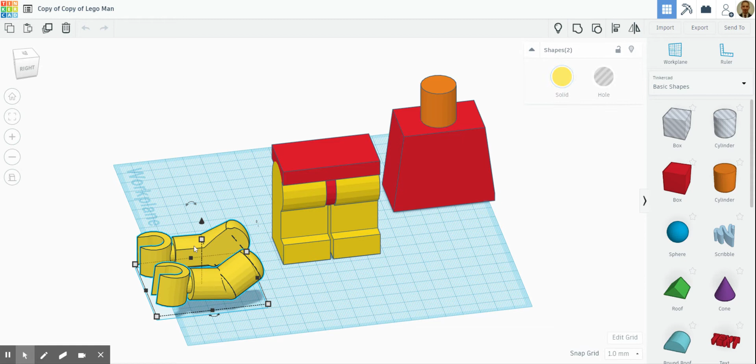Okay, so we're just looking now at the torso and the legs and hip. Remember, if you switch this button on and off, you change between views. Because we're doing some moving around today, it's a good option to have it like this, so we just get a nice view from the front.

What I'm going to do first is get it into a position where I want it, and then I'll use the align tools to get it exactly where I want it.

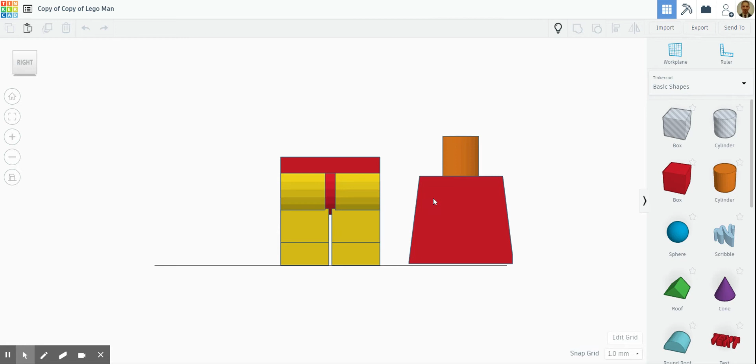So I'm going to click here, and the first thing I do is use the cone to click and move it up to whereabouts I think it is. Now down here, remember, you can change the increments, so if I make it move up 2 millimeters or 1 millimeter, this is really good for precise movements.

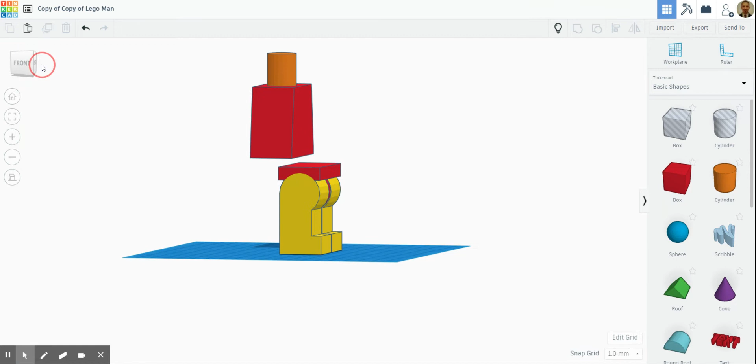So thereabouts, then I'm going to spin round and look to the front view, and then do the same again, but this time use the arrow key just to try and line it up with that hip. Looks like it's in line there.

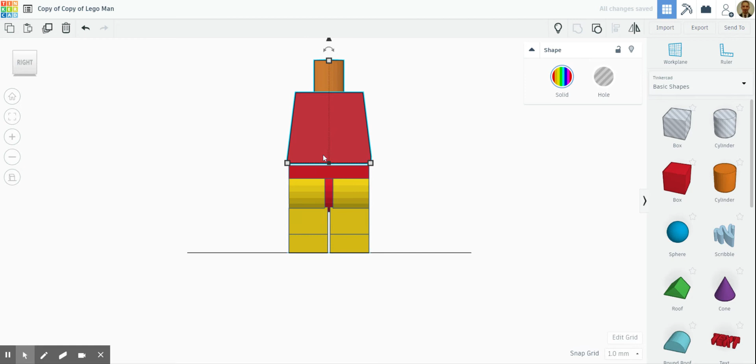Spin my view around again, and now I can use this view and then use the arrow key to get it into roughly the right area, like that. So I can see that's a little bit off, so a little tap.

What I'm going to do is just move to the 3D view, and I'm going to click that and that, hold down Shift, go to Align, and I want to click this one down here, which will line it into the middle, like so.

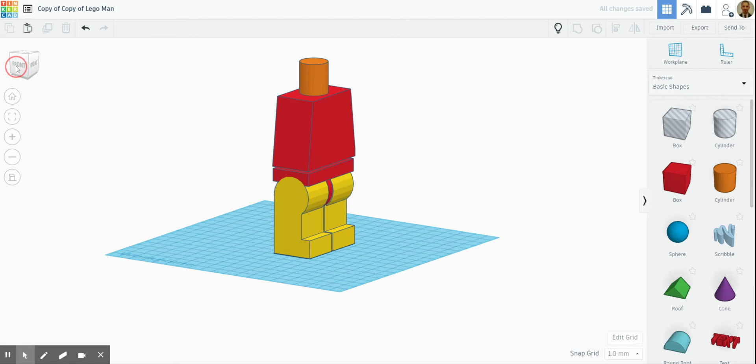And then I'm just going to change my view, and I can see that it's almost there. So a little bit of fine tuning now. I'm going to click this, and I'm going to just slide down this movement.

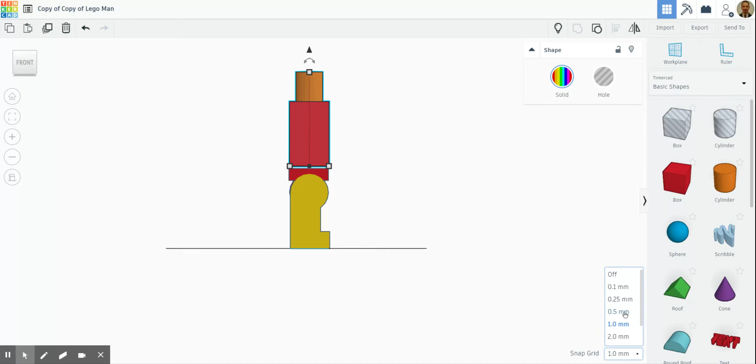By clicking the cone, I might change this to 0.5, like so. Okay, like that. A little bit further, probably, so it just touches it.

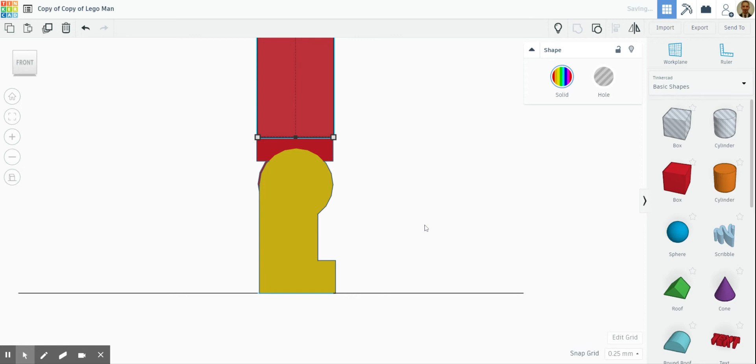Okay, and then we can see it's just touching, and I'm going to just change this, and then just a little movement. Still got a little bit more. Going for perfection. Okay, in line, perfect.

Got to look from the front now, and we can see I'm not quite there. So again, some little taps with the arrow key just to get it in the right place. That looks about right to me. So I'm happy with that location of that part.

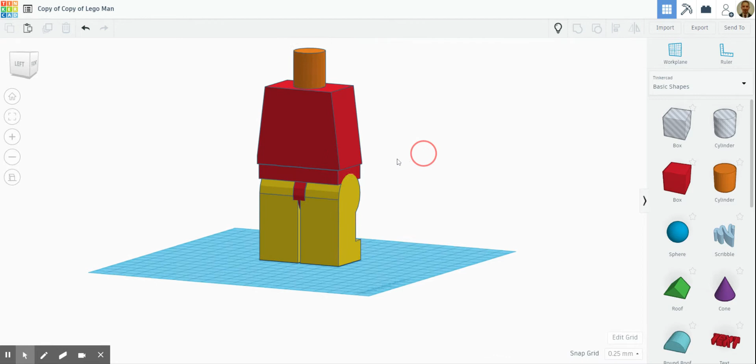Now I'm going to unhide the rest of the parts.

So here, now I'm going to go for the head. So let's go to right, same as before. Again, we're not rushing this. We're trying to be as precise as we can, using all the views to get it right.

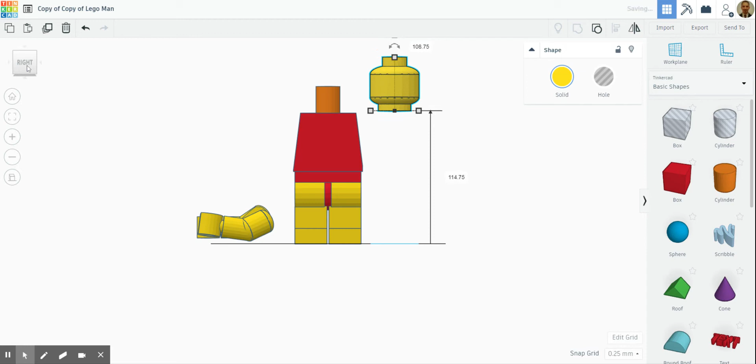And spin around to the other side. And then again, I'm going to use the arrow keys. I'm going to increase this to get a bit more of a movement.

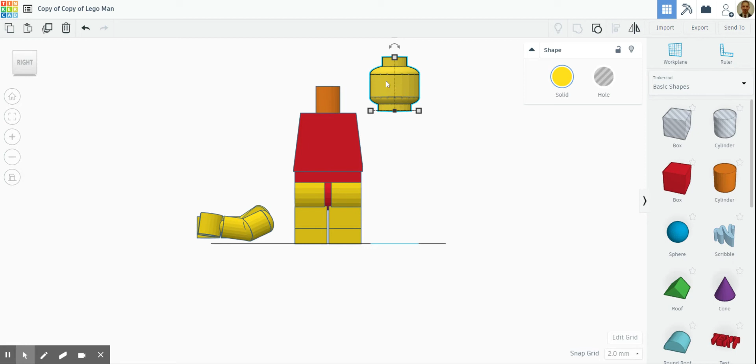Okay, so it's there. I can now know that if I move my view around, like this, I will then put this in the right place by moving it across. Okay, like so.

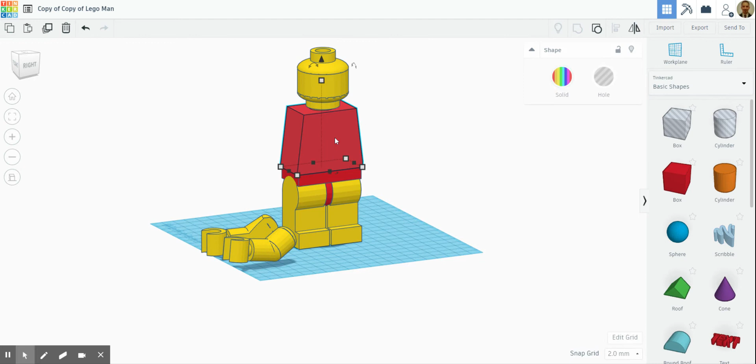We can also look from the top, looks about right from there, look from the right. If you want, you can click that and hold down shift, with those two parts click the align tool, that part, and then that part, click align to align that head to that torso.

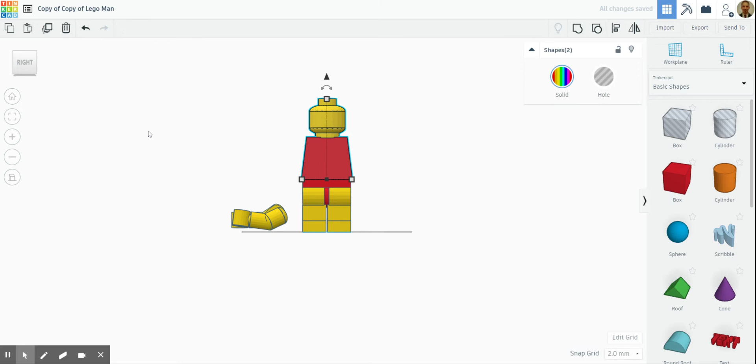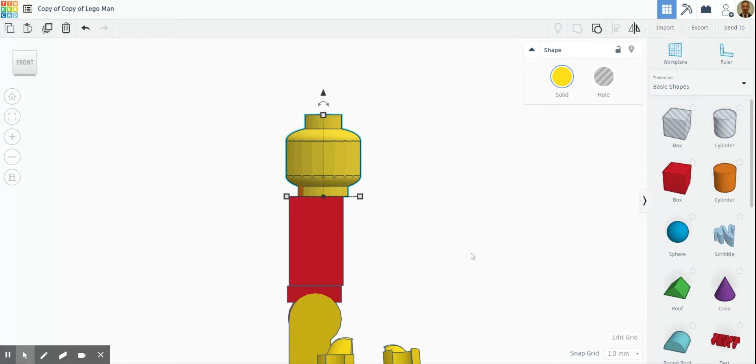That looks nice. I'm just going to have a quick spin around, see if anything else has moved. Okay, I can see that when I did that align, a few things moved. I can also see that things aren't aligned here, so I'm going to get that and change that increment, move the head.

That looks better. Now what I'm going to do is click that and then that, and group those two parts together. When you're grouping, make sure that you have this ticked, multicolor, which means it will keep the colors the same. So the head is now grouped to the torso.

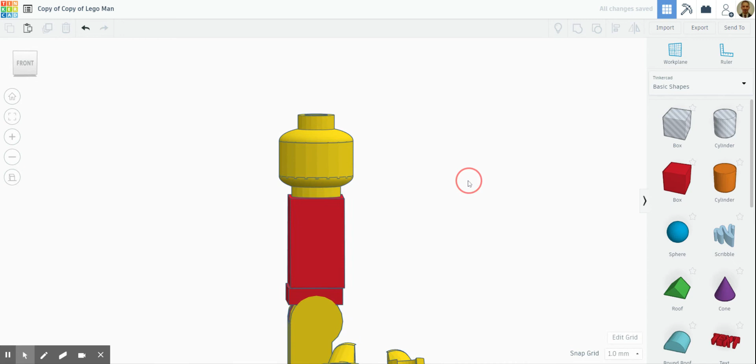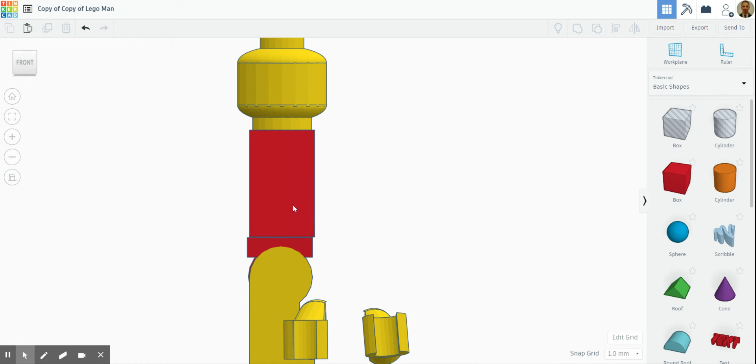And what I'm going to do is tidy up that part there, at the front. It's going to be a funny view, that. Okay, that's better, I'm going to just move that across. There we go, okay, I'm happy with that as well.

So once I'm happy that's in the right place, I'm going to repeat the process. I'll click that one, making sure I've got this multicolor here, and group the legs to the torso. So now all that is grouped together as one piece.

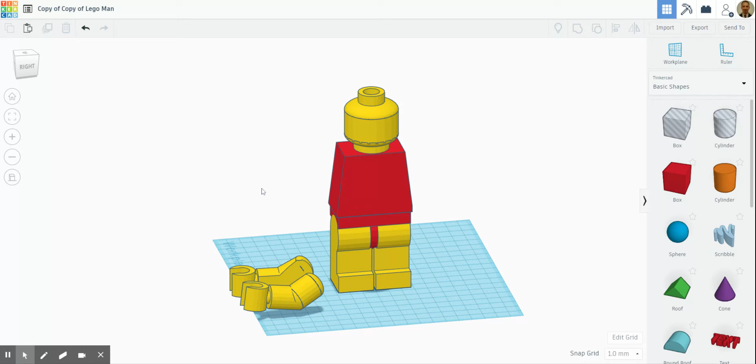Now I have to do the arms. The arms will go on either side of here. So for that, we will first need to rotate both arms. So click, and then - not make them bigger, don't do that. See how easy it is to make things change size if you're not careful. Rotate them round, say 90 degrees.

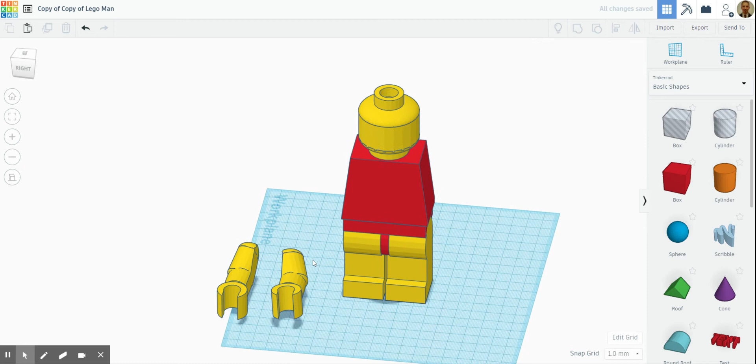And then what we're going to do is move this arm to the other side, right across like this. Make sure I'm in the right view. And then I'm going to move that arm right across like this.

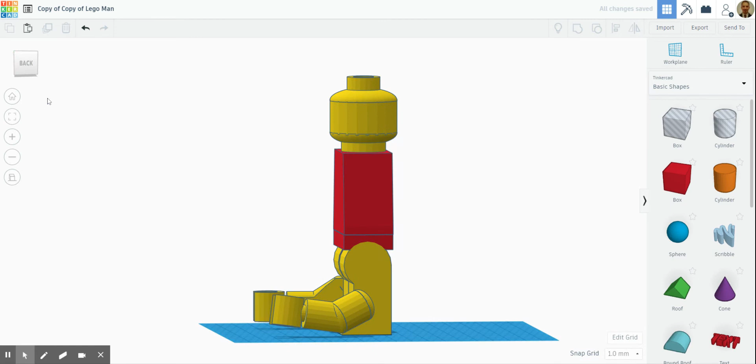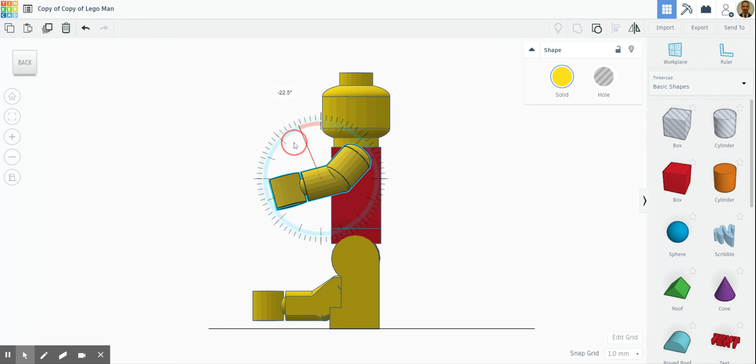So what we're going to do is put a bit of a rotate in that arm. Maybe this arm, let's say, going up, or we'll have him - yeah, like that I think. I'll have one arm down like that, okay?

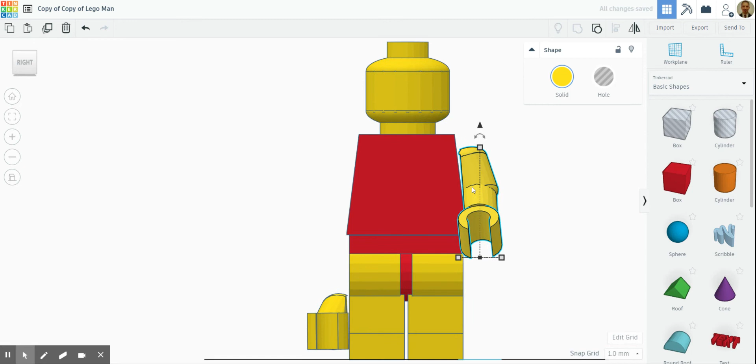And then I'm just going to move that to whereabouts it would be in the midpoint of his sort of area here, down to the front, and again just that idea of getting it nice in line with that. Now, because there's a twist in this arm, we have to put a twist in this to make it touch this.

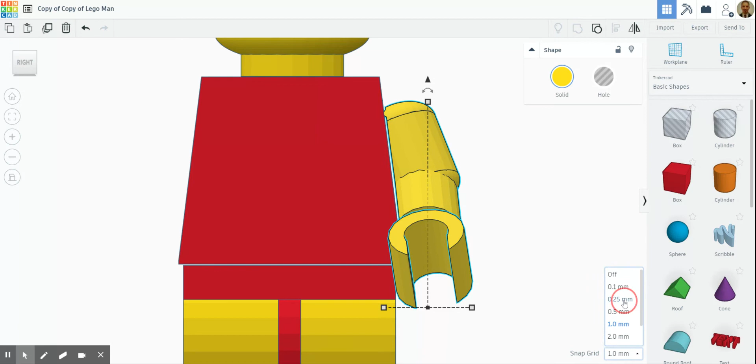So again, I'm going to click this, hold down shift, give a bit of a zoom. Okay, a bit of a zoom. And all I'm going to do is put a very slight rotate in the arm. Okay, so that's almost parallel with that. Click that, and I'm going to change this to 0.25. There we go, it's just touching there perfectly.

And I can see here I've got a little gap, so that might need a bit of tidying up in a minute. But I'm just going to do that afterwards, and then I'm going to do the other arm. So the other arm, again, same as before. And again, we're not rushing this, we get it precise - that's really important, getting it precise.

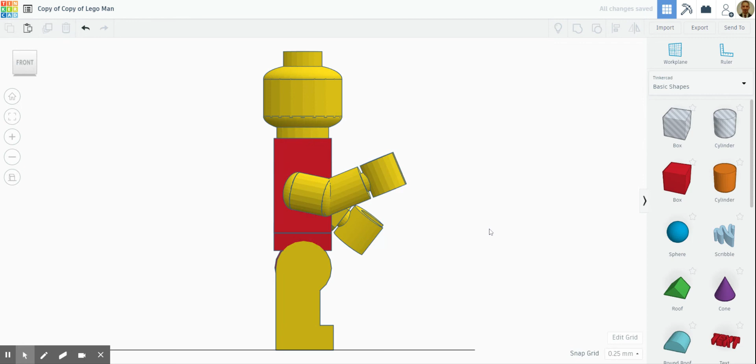Arrows, and I think I might just keep this arm straight. We'll rotate it up a little bit like that. Okay, and then we'll move him up a bit. Try and get the same part. If you can't find it, look from the back, then try and line these two points up, and you'll be able to see that it's roughly in the right place because we want the arms level.

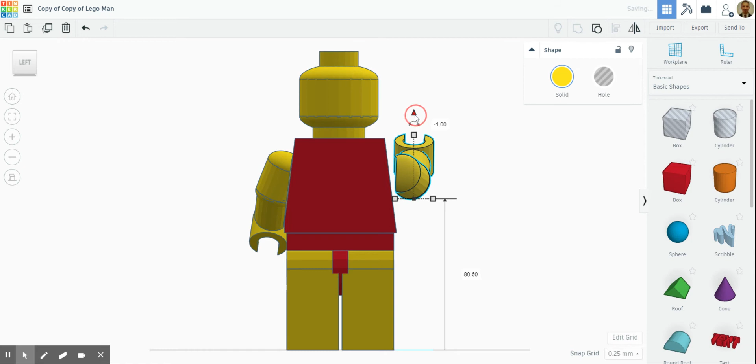Or if you want to be super accurate, you can measure from the bottom. But I tend to find in these sort of situations, if you do it by eye, that tends to be pretty good too. Then, as before, let's look at the front, and let's move this again across.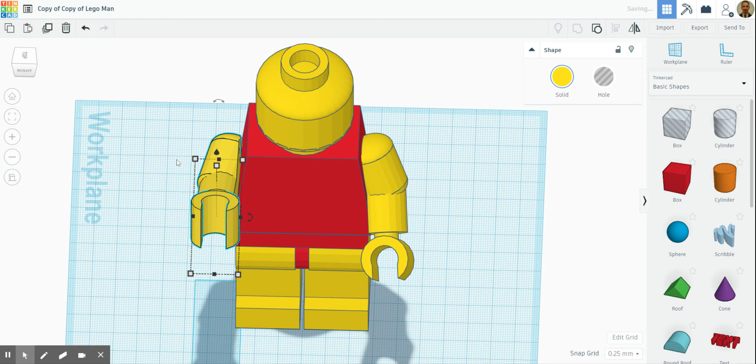I'm just going to change my view so I can see a bit better. Orthographic, clicking that. Okay, and then I may look for the top this time, and I'm going to put that slight rotate into the arm. You can just see, again, let's have a look from the right.

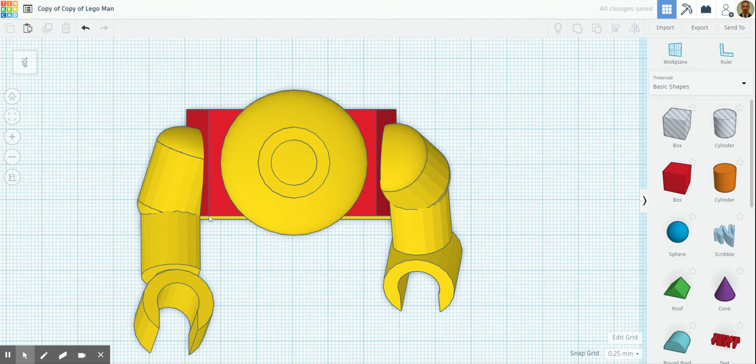You can just see it's nearly there. Then look from the top. This is really good for you to understand how to assemble things and use different views. There we go, that looks good to me.

Right, so let's just zoom out. Let's have a look what it looks like. Okay, yeah, arm there, arm up, arm down. I did say that I wanted to try and improve that little area, but it looks good to me.

So if we switch to 3D view, and then we can see now, if we highlight all of it and make sure that is multicolored and group it. So that is the Lego Man done and finished.

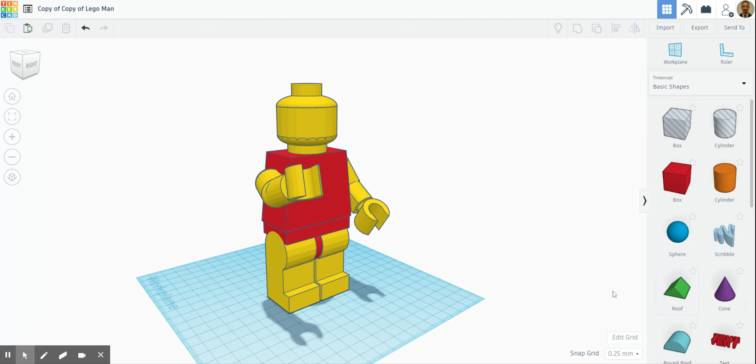What you could do as an extension task, you could maybe try and design a hat for him using the cylinder, sphere tool, maybe a cone hat. Could you design some patterns for his shirt? So, for example, we know that Tinkercad has lots of predefined shapes.

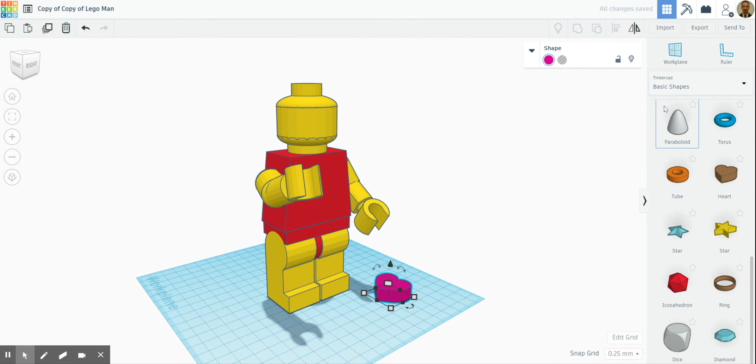Just thinking out loud here, we could just maybe get a heart. We could change the colour of the heart. Could we then, let's change that to that. Okay, we could add a thickness to that. Maybe make it, oops, not that one. Maybe make it something like that, 2 millimeters.

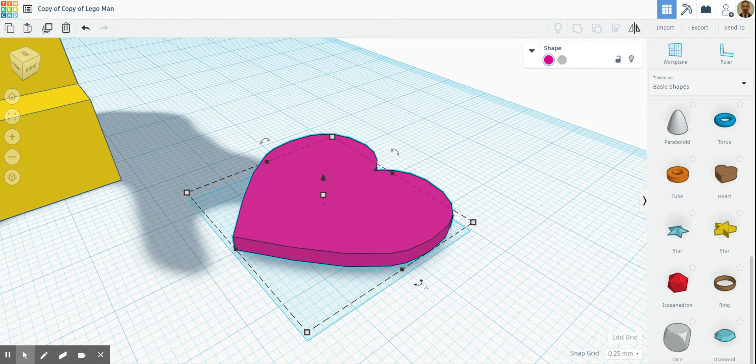Let's go in and zoom that a bit more. We could just spin it round like that. We can then resize that, something like that. And then we could add a rotate on that to bring it round like that.

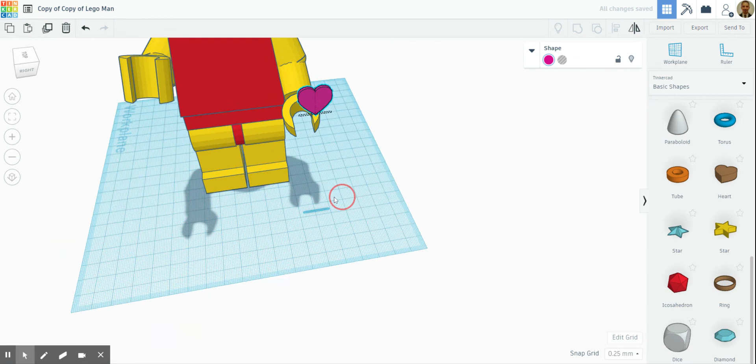And again, just a simple process, you've done this before. Okay, can we look then at putting that in the right place? So what I could do is, so I can view things, I can ungroup it. I could probably hide that arm so I can see what I'm doing. Again, great practice for using the different views to do things and hiding and unhiding things.

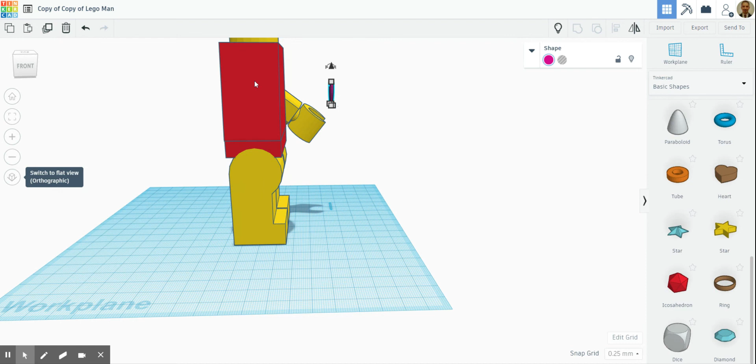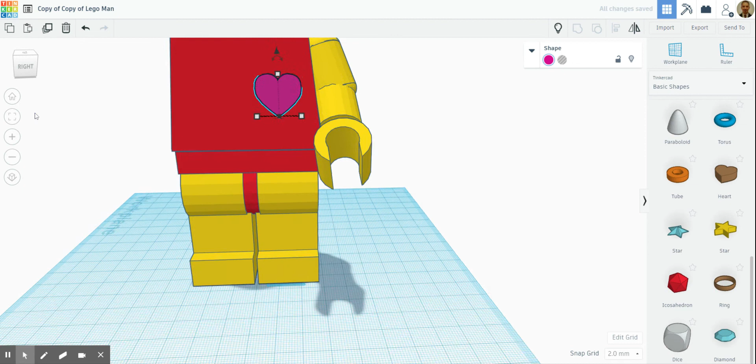Increase that so it moves a bit quicker. Okay, so let's spin around the view. Let's click this. So you could do things like draw a shirt and tie, find a minifigure and actually draw the pattern of a shirt or something on the front here.

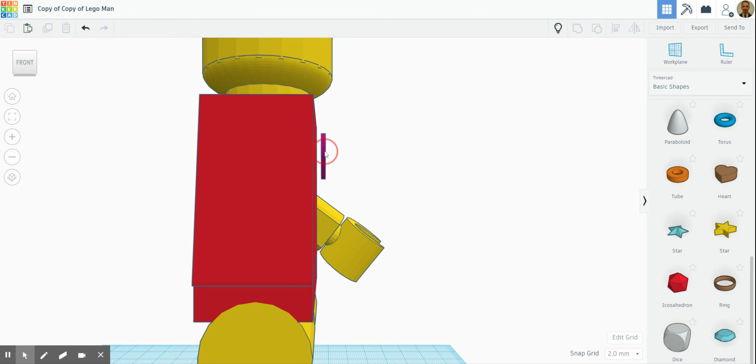I'm just going to go for a predefined shape that's a heart, like that. And let's just check the other view. Okay, that's a little bit further away. Good to me. Spin it round like that.

So there's lots of predefined shapes which you can have a look at in the menus. You can go to all, and you've got lots of things here. Maybe not a brick - you could maybe build a brick wall behind him.

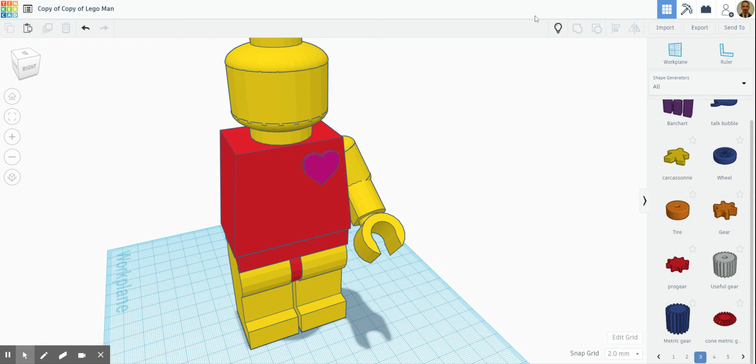Maybe you could write your name on him, give him a name, or you could design something that you can maybe hold in his hand, a hammer, or some sort of tool maybe. So there's lots of little extension tasks that you can do with this to improve the overall look of your Lego man.

So enjoy, that's the final video. Hopefully you can assemble it and have a go at some extension activities to make your Lego man look a little bit different from everybody else's.